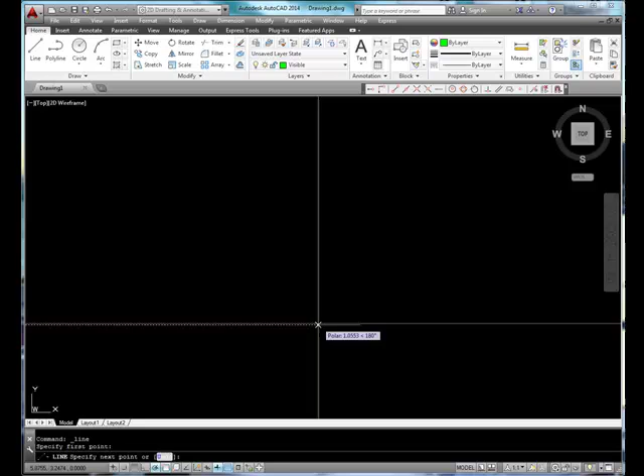I'd like to start out by just drawing a line. Make that line 6 units in length. I'll draw another one that's 2.5 inches, another one that's 1 inch, and we'll make this one 2 inches, and then I'm going to exit for the time being.

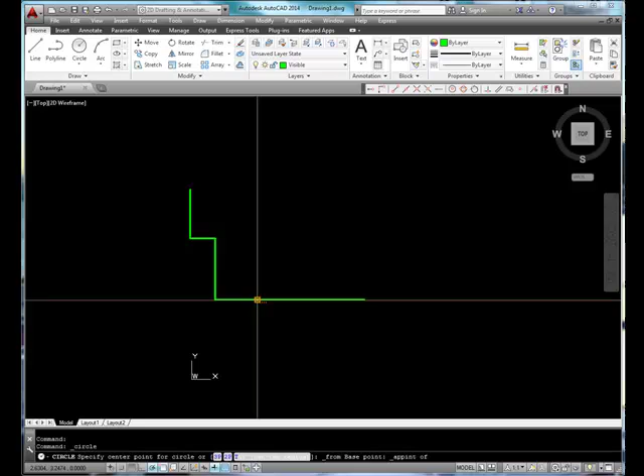Next I'm going to draw a circle, snapping from the apparent intersection of this line and this line. I'll measure at 7.5 units in the x direction and 4.5 units in the y direction, and draw a circle that has a radius of 1.5.

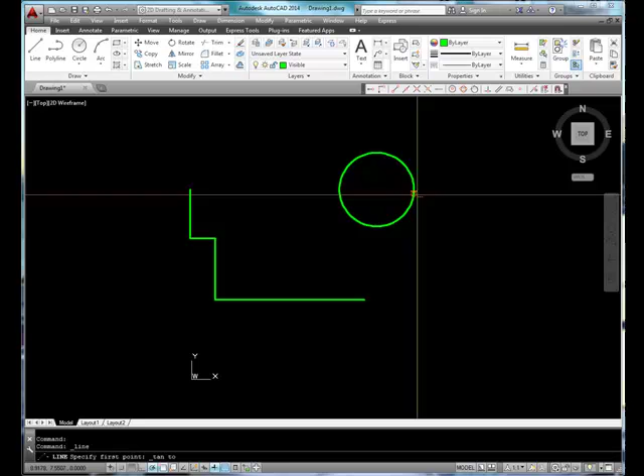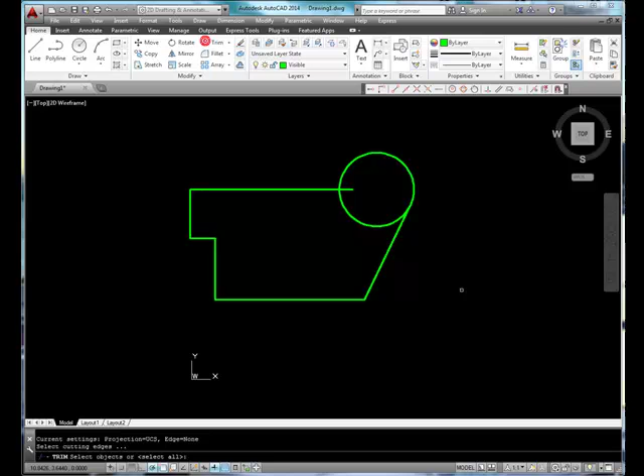I'll follow that by drawing a line that is tangent to this circle and terminates at this end. I'm going to draw another line from this endpoint, and make it intersect with that circle. I'll use the trim tool to trim some of this geometry.

Now I pretty much have the basis for drawing the gasket. There are a couple of little things I need to do. For instance, I need to create a fillet. I'm going to type R for radius, press Enter, and type 1. I need to have a 1 inch fillet right here.

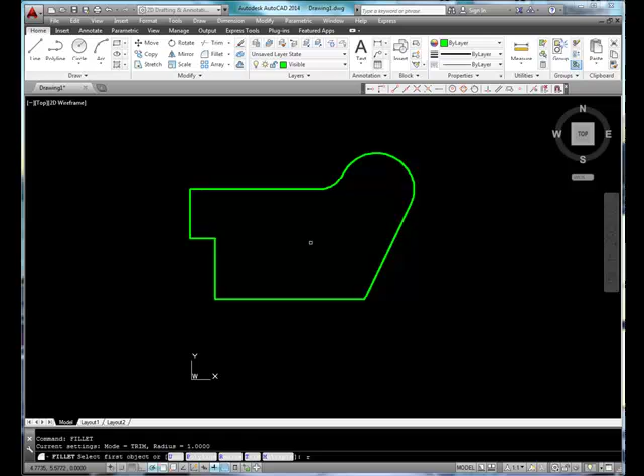I'm going to repeat that command, and type R for radius, and this time I'll enter 0.25, and fillet each of these two lines.

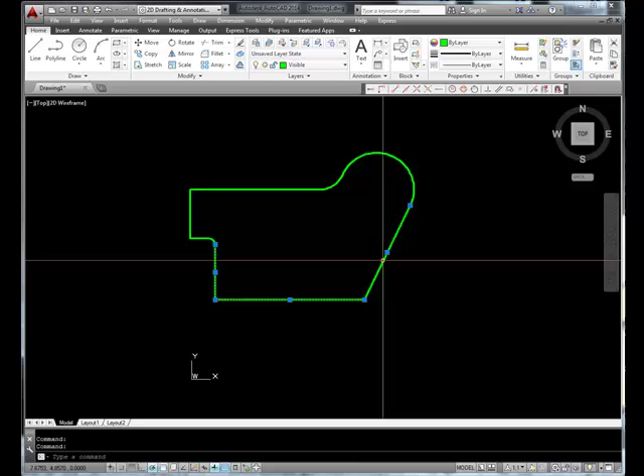Now recall that each one of these lines was drawn individually. I need a way to glue the endpoints of all of those lines and arcs together as though they're one object. To do that, I need to use the Polyline Edit tool.

That tool can be found here in the Modify pull-down menu. I'll click on that, and click on any one of those objects. The prompt at the bottom of the screen is asking, do you want to turn it into one? What it's really saying is, this line is not a polyline, do you want to turn it into one? I'll type Y for yes and press Enter, then click on Join, and join this line to every other line that completes a polygon. I'll press Enter, and now as I hover my cursor over that, you can see that it's all one object.

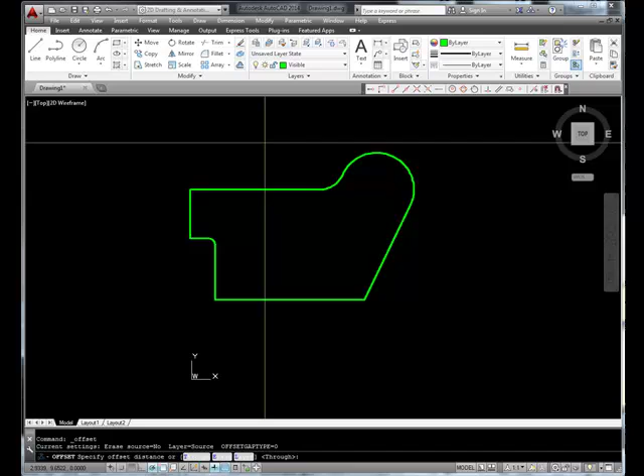The next thing I'm going to do is use my Offset tool, and offset this by a distance of 0.5. I'll offset that to the inside, right-click, and click Enter.

Let's click on the Fillet tool again. Just like before, I'll type R for radius, press Enter, and type 0.25 as the radius, and fillet each of these two lines.

I'll repeat that command, type R for radius, and type 0.75, and fillet these two lines. I'm going to repeat that command one more time: type R for radius, press Enter, type 0.5, and fillet those two lines.